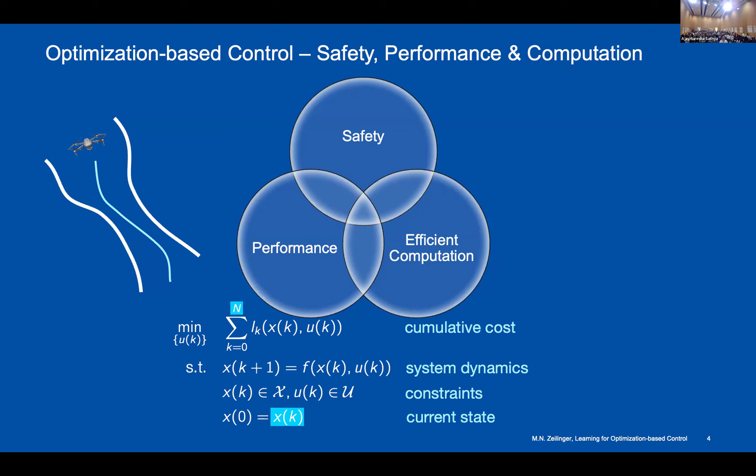As a result, we're usually not solving this problem, but we tend to solve rather short horizon problems, but we repeatedly solve them in sort of a model predictive control type iteration in order to mitigate this issue of solving these problems in real time. In addition, of course, there's actually lots of uncertainty in this problem when we think about doing this for rather complex control problems in the dynamics, because either we cannot model the full dynamics, we don't know it, it's changing, but also in the environment which we see through the constraints, or in the objective function, which has to usually be a rather simplified surrogate objective in order to solve these problems.

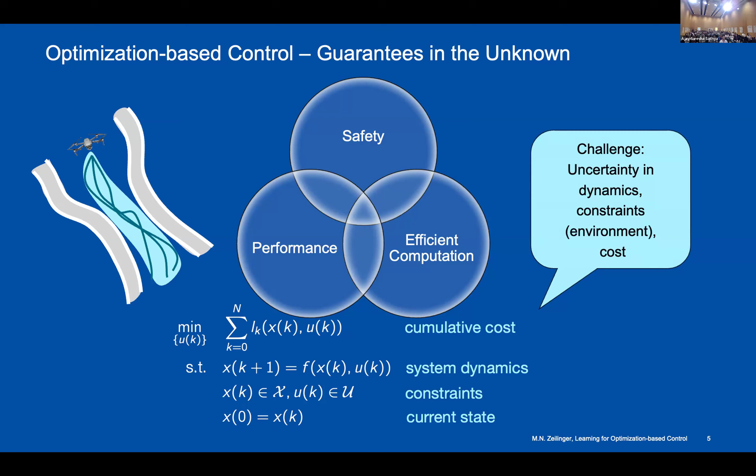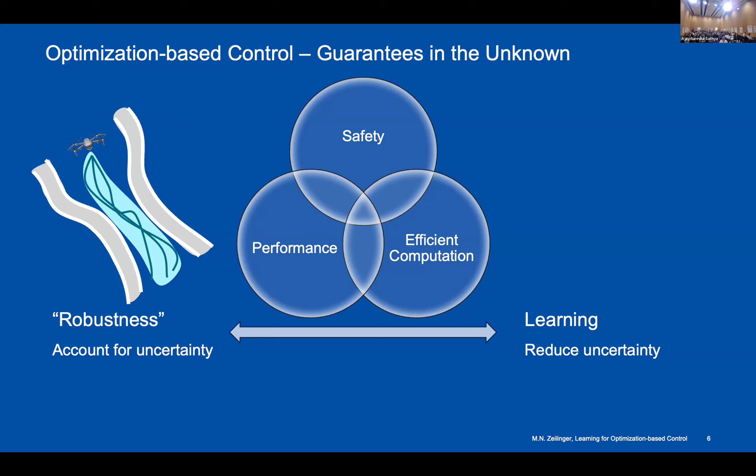So in our work, we take two sides to this picture. On the one hand, we think about how now to get these constraint satisfaction guarantees under uncertainty, which here I term loosely robustness under uncertainty. And on the other hand, how we can reduce the uncertainty by learning more about the unknowns. And it's really about the balance between these two and the interplay that I think we need to manage very well in order to get effective methods that are high performance and with guarantees. So I'd like to tell you a little bit about ideas that we have developed in the group on both sides of these.

But before we dive in there, let me just come back to this original definition of safety here for a moment. So I said that by just using a prediction of the dynamics, we can impose directly the constraints. But of course, if we only predict a short horizon forward, then this is not fully true because we want guarantees for all times. We actually need to think about invariance. So we'd like to have ideally an invariant or a control invariant set in which we know we can keep the system so we cannot violate constraints in the future.

If we write this in this predictive form, then it's actually not so bad if this is a conservative approximation of some invariant or control invariant set, because we can plan with the trajectory towards it and thereby get constraint satisfaction guarantees. This is, of course, no news for people working in predictive control because that's the entire backbone of it. But interestingly, you can extract that as a principle also to get constraint satisfaction guarantees in other combinations.

So people have now used this, for example, in multi-trajectory MPC, where you plan the performance and the safety trajectory. We've used it to run safe exploration methods. Or you could also decouple it from your optimization of a real control problem and think about this more as an additional component. So rather than integrating it into the controller, you can think of this as a component that just verifies if some proposed action can be safe, which is often termed a safety filter.

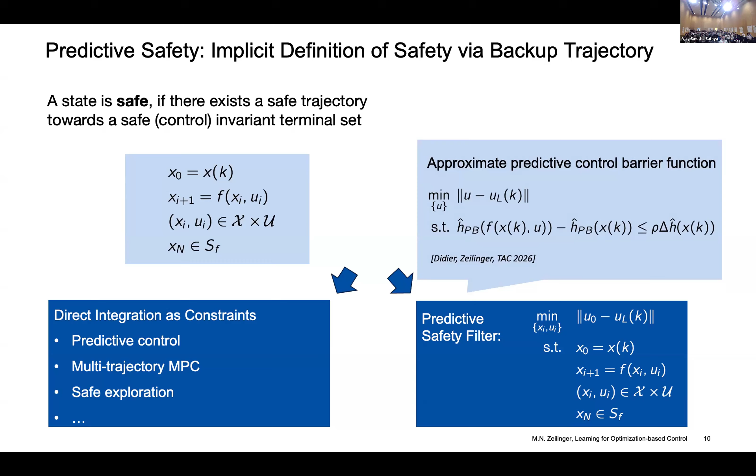They're all related. And if you're interested to read more, you can look at this article in the Control Systems magazine where we've tried to put the things sort of next to each other. But also control barrier functions, of course, in a sense, can be seen as an optimization-based way of certifying constraints, because rather than now having this prediction horizon, you sort of condense it into one decrease condition that you need to verify. And you can connect these two, for example, through approximations of this horizon into a single decrease condition.

So unfortunately, I don't have time to talk about this more, but this is sort of how we think about constraints. We think about it as planning a trajectory forwards to some safe set, and I won't be talking about the safety filter perspective for today. But now what do we do if we have uncertainty? Now we need to think about constraint satisfaction under uncertainty.

And as was mentioned before, our group has actually now spent, I think, a decade thinking about how we do this rigorously, both thinking about robust methods where you assume bounded disturbances, but also thinking about the stochastic setting where you could have potentially unbounded noise. For both of these directions, what is really key is to find a good balance between rigorous methods and guarantees, as well as computationally effective techniques.

And I'd like to briefly show you one variant, which is an online optimization method that we have developed. So let's assume that we have our nonlinear dynamical system and we have some additive bounded uncertainty on it. Now, the fundamental principle of robust constraint satisfaction is that you reduce your planning to a nominal trajectory. You apply a tracking controller to keep your uncertain system close to that.

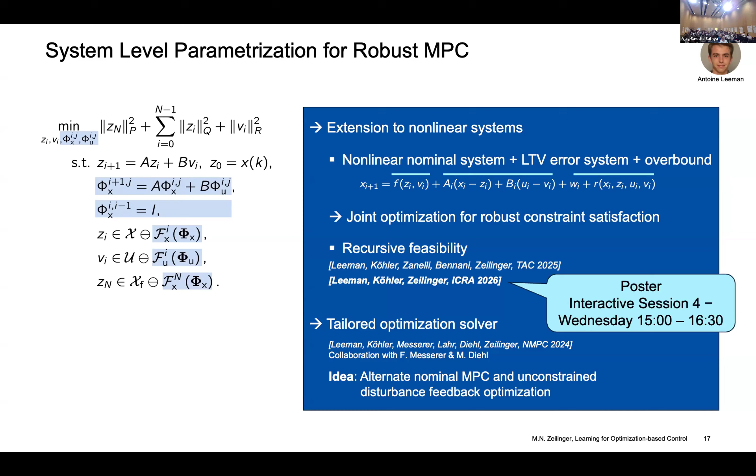So Antoine, who's working on this, has then also complemented this with the recursive feasibility proof. So you can now also run this in a receding horizon. And if you're interested, you can visit him at his poster on Wednesday afternoon, and he can tell you more about this idea. What's really exciting to see is that we get very efficient computation times.

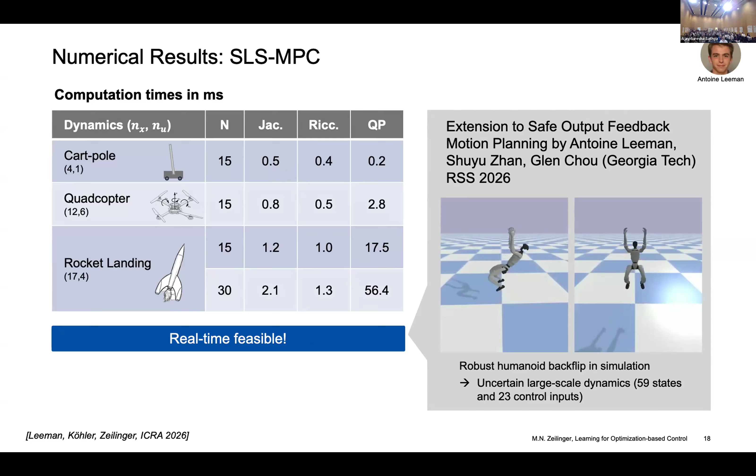We've done it for these sort of smaller scale systems, but recently he's also worked with Glen Chou from Georgia Tech to extend this and apply it to higher dimensional robotics problems. And also for this, we've extended it to output feedback. And what you can see here is a larger scale humanoid in simulation for which we were able to compute these robust nonlinear solutions in very efficient computation time. So I think what this is showing us is that we're sort of close to scaling these things up to full-scale robotics problems.

Okay, so now we have an idea of constraint satisfaction, and I've shown you one idea of what we could do when we need this under uncertainty and how we could do effective robustness for nonlinear systems. Now let's think a little bit about the learning side. So as we're thinking about learning in this optimization-based control setup, we'll think about this again in all the levels that we have in our optimization problem.

So we'll think about learning that can be used to improve a model of the dynamical system. Think about learning of the constraints in case we do not know them a priori. And we can also think about learning of the objective in order to get a better representation of the short horizon cost to improve the performance. I won't have time to talk about all three today, so I picked two. I'll talk about the dynamics learning and then the objective one, which is some recent ideas that I've been developing. And I'll comment on the constraints as we go through the dynamics.

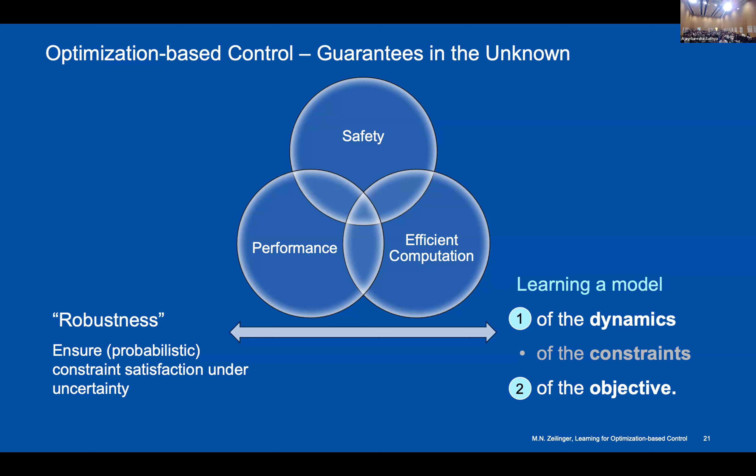So our group now has spent quite some time thinking about how we can make use of a Gaussian process model in order to improve the description of our dynamics if we have complex effects that we have a hard time modeling with physics-based models. Why a Gaussian process? Because it doesn't need a lot of assumptions on what we're modeling. Basically define the mean function, which is often even zero, and a kernel covariance function, and then you can condition on the data points, and you get a distribution of this function that you had a hard time representing.

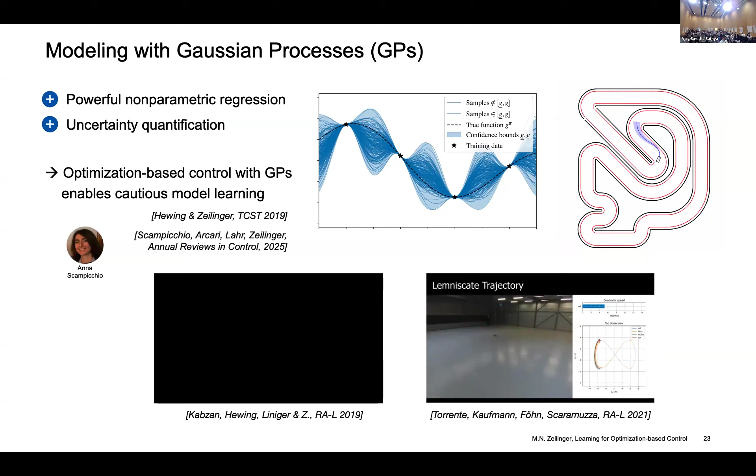And we've seen some very nice results in our group, but also other people have applied this, for example, to drone racing. But of course, in the spirit of getting constraint satisfaction, the nice thing is that we can also directly get an uncertainty quantification of the residual uncertainty that we have after using such a Gaussian process model. If you're interested in reading more, our former postdoc Anna, she's now an assistant professor at Chalmers, put together a nice review article on Gaussian process-based cautious model learning, if you want to read a little bit more about the details.

So in addition to getting this posterior uncertainty, something that has also become quite popular in the field is that by making certain regularity assumptions, you can come up with high probability confidence bounds, so upper and lower bounds on these functions that contain the true function with a certain probability, that you can then use in a sort of robust type framework. I'll here talk about the dynamics learning, but I promised I'd point this out. So you can do similar things when you think about constraint learning. If you don't know the constraint, then you can represent it as a GP, for example, and then do safe exploration by sort of slowly learning more about your constraints.

I think we've made significant progress in two directions recently with this GP-MPC. One is in the computational direction, and the other is in the theoretical one. The first one, and this is Amon's work, who's here in the audience, is to really think about an efficient implementation. And this is also a collaboration with Moritz Diehl and his team, where first we were able to connect this to an approach that they call zero-order approximation, developed for robust MPC. And we can extend this to GP-MPC to show that we do get feasible solutions, but suboptimal, of course, at

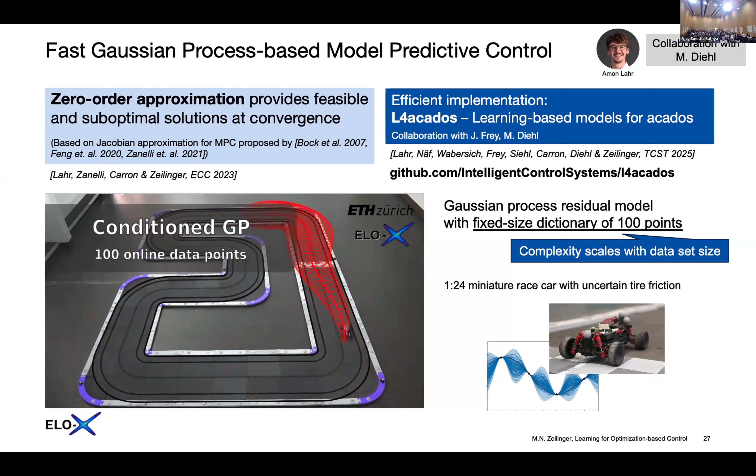Here's an example for a small-scale racing setup in the lab, where we have the car with uncertain tire friction that's modeled with the GP. And we run this with 100 online data points, so a fixed dictionary of 100 points. Because, of course, the disadvantage of the GPs is that the complexity scales with the number of data points. So here we fixed it. But what you can see is that you can run this very effectively in real time while propagating these uncertainties. Of course, what we didn't like is that fixing of the window, and so many other sparse GP methods had similar disadvantages.

And so Amon worked with a student, Lars, and they extended this now to a spatiotemporal GP setting, where the nice thing is that we can rewrite the temporal aspect as a Gaussian state space model, and then apply things like recursive Kalman filtering to get very effective constant time updates. So now you do not have to window your data anymore, but you can really just run this through your streaming data. And I think this is a very nice start to thinking about this continual learning and adaptation.

The example that you see here is one where we have a time-varying perturbation on the steering. So what is applied to the system is not directly what we plan and compute. And you see in a moment when the perturbation happens with the nominal MPC, then it deteriorates in performance. If I fast forward a little bit, if we now have the spatiotemporal GP-MPC, you can again see these uncertainty propagations. We do not have a perturbation yet, but when the perturbation happens, then we immediately learn about this because we're just continuously taking in the data, and we are able to maintain the very low lap times and the nice performance of the system.

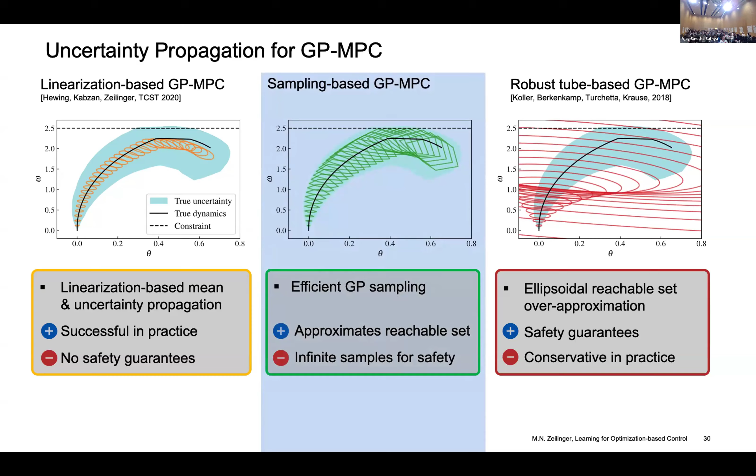I want to show you one idea that I think is appealing because it's based on sampling. So it's rather practical and what people probably would do. So you're thinking about sampling from your GP, and what we see is that you can actually get very good approximations of your reachable set. But of course, thinking about this confidence bound, you could first think that you would need an infinite number of samples to cover that and to get safety guarantees. However, you can pose the question slightly differently and actually ask, well, I need a sample that is close to the unknown function.

So how many samples do I need? And that's sort of what Manish worked on. It's work with Andreas Krause at ETH Zurich, where he was able to come up with a sample complexity bound so that we can guarantee with probability 1 minus delta that we have a sample that's epsilon close to the unknown function. And then now you have this epsilon uncertainty that you need to propagate, which is much better than the full uncertainty spectrum that you had with the confidence bounds.

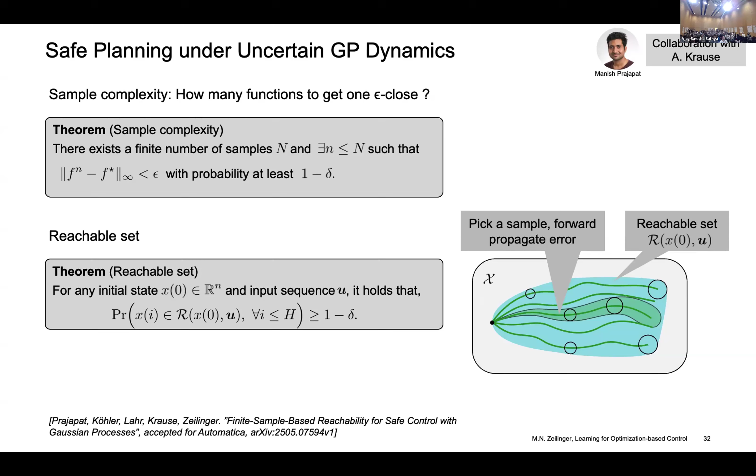So now you propagate these uncertainties around your sample trajectories to give you the reachable set in which your unknown function can lie. You can directly put this then into your predictive control formulation by now solving it over your samples and tightening the constraints appropriately. We've worked both on the theory of this, and here you can actually see this again running on the race car where we have, I think, about 30 samples running forward.

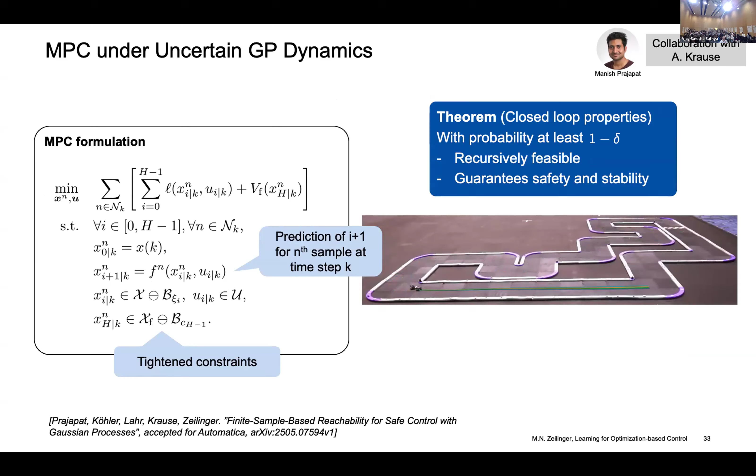So we worked on the theory, so we can also give closed loop guarantees for this, because the feasibility is a tricky one, but you can also get that. And Amon has then also worked on a tailored solver for this, which we presented a couple of years ago for sampling-based GP-MPC to also make that run very efficient.

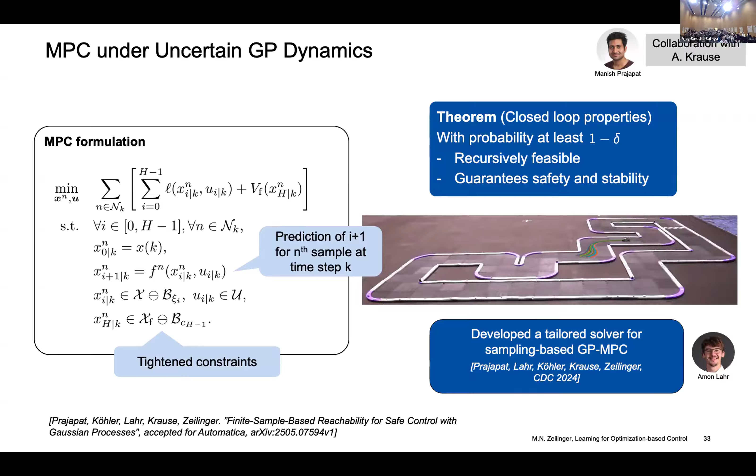All right, before I run out of time, I do want to talk a little bit about this idea of learning about the objective. So what is the idea? As we said at the beginning, we often have to run with very short horizon costs when we run MPC. And that is often hard to design, but it's also difficult to capture a lot of context and additional information that you can get in this objective function that you want to minimize.

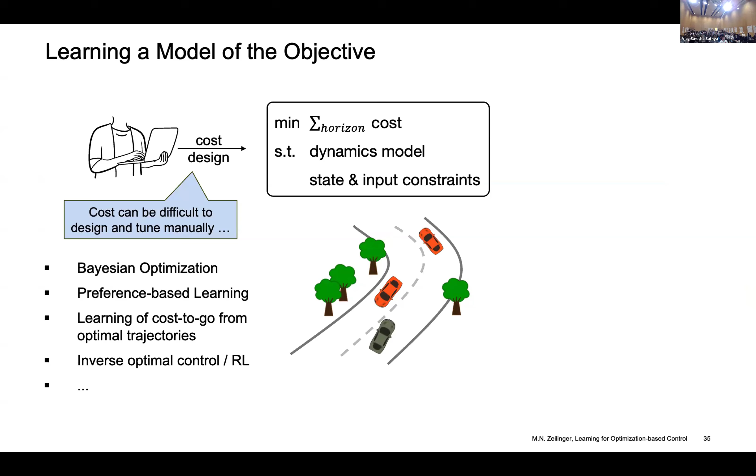People have approached this with different methods, auto-tuning, preference-based learning. What I'd like to discuss with a few examples is how we could learn the objective from demonstrations. And again, our key focus here is that we're thinking about constraints. So constraint settings, and we want to learn the objective from demonstrations. We could do this with inverse ideas. So you see an optimal demonstration and you have to come up with the objective function. But I don't want to go into more detail.

I want to show you some ideas for very recent things where we're trying to connect some of the powerful learning methods that we have today in order to map rich context and information into a short horizon objective function that we can then solve with the MPC. And by keeping this optimization problem, we get very nice generalization and we keep the constraints in there, which is really the benefit of doing it this way.

The first idea is called ZipMPC. So what is it? Well, we assume that if you had a very long horizon to look ahead, then you could take all the information, all the context that you want, and you would be getting the true optimal solution. Now, what you do is you try to imitate that with a short horizon MPC cost. So you're basically learning the cost parameters. It was mentioned before that what people have tried is to learn the terminal cost, right? So here, this is actually a generalization where you're learning all the cost parameters to get a better approximation of this very long horizon behavior.

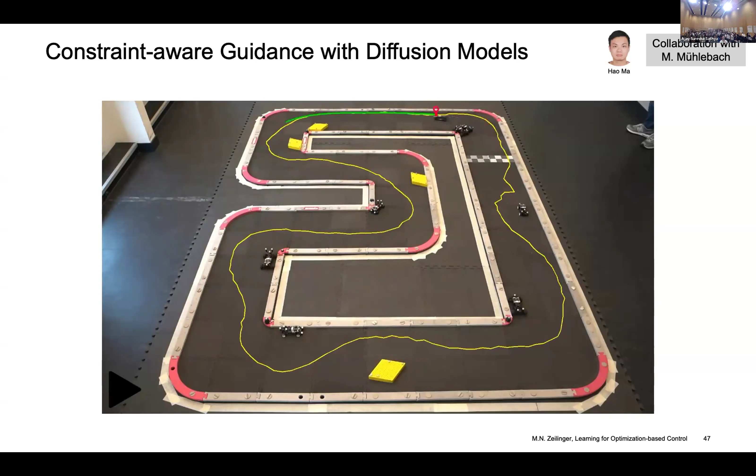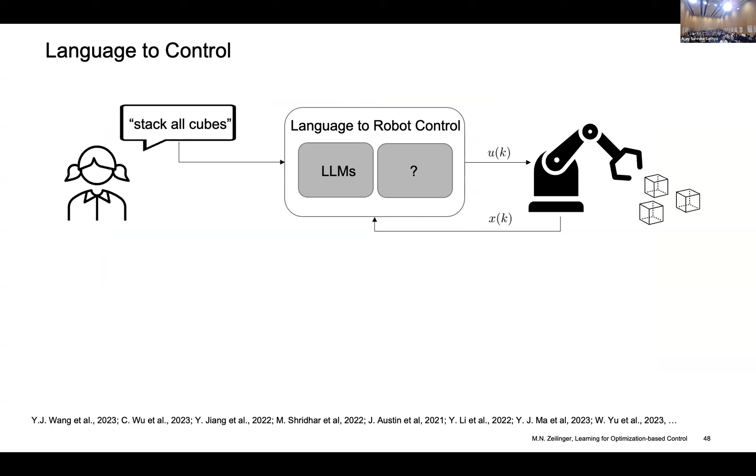Okay, finally, I'd like to talk about another idea that's pretty obvious and many people have thought about: using language directly to design the optimal control problem. It's very tempting that you could just say to your robot, stack all cubes, and then it would go ahead and execute that command. Well, why would you want to do that with LLMs? Because they're very good at breaking down your complex tasks into subtasks.

And actually, I was surprised to see this at the time. It's also very good at coming up with optimal control problems for each of these tasks. So it's actually kind of appealing. However, what's a little bit hidden is that you have to train this very carefully with examples for each of these subtasks for this to work. Plus, when you give it a new task, you have no idea if it actually works or if it will do something incorrectly.

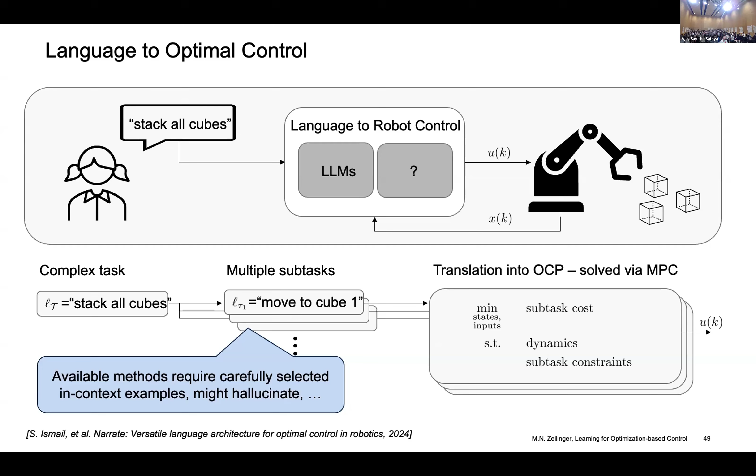So we've thought about this problem, and we address these challenges in two different ways. One is that, in order to learn these subtasks, we write it as an inverse learning problem, also under constraints, so that we can effectively learn the subtasks from demonstrations. The second one is that we assume that there is some structure underlying the robotics task. So when you're grasping something, it doesn't change completely from task to task.

So we're assuming that there's a mathematical structure, some features that are shared, and parameters that, of course, vary between the tasks. And then we learn a mapping from your language embeddings to these parameters in order to generate the optimization problems to execute the task. What this allows us to do is to assess subtask similarity if we're seeing a new task, to say, are we confident that we can execute this task or not? And then we can reject the task if we're not confident.

So this has been a great collaboration between three different labs. We also worked with the Robotic Systems Lab at ETH to bring this first in simulation onto a robot arm, build a pyramid or clean a plate, and then we also brought it, just for demonstration purposes, onto the real gripper. But I think it really shows another nice way of using some of these powerful tools and connecting them to optimization-based control problems.

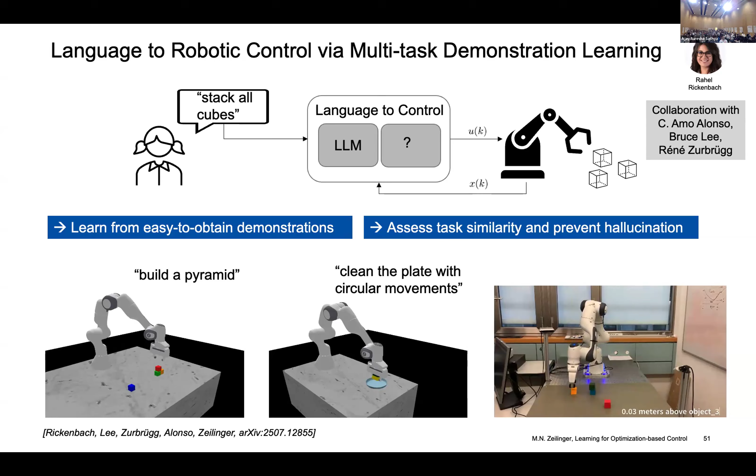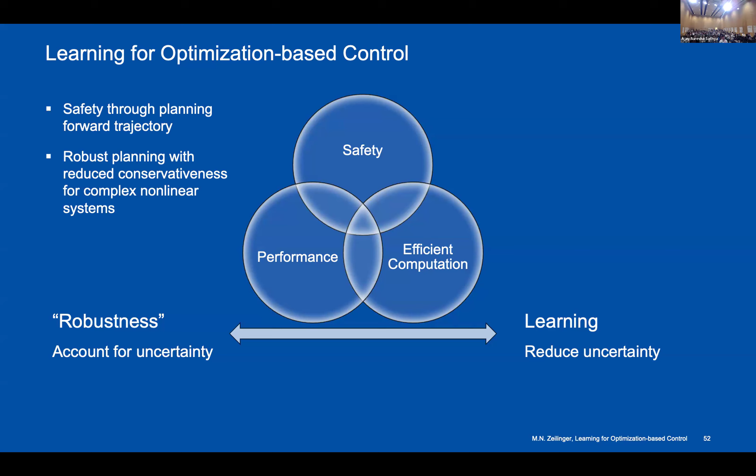All right, so this brings me to the end. What I wanted to convey is that optimization-based control is a great foundation to combine strong safety guarantees and high performance. We talked about robustness, thinking about safety through planning, and robustifying this with online optimized error mechanisms. And then we talked about learning, Gaussian processes for dynamics learning and MPC.

And also, lastly, this idea that we can use a short horizon effective optimization problem and use learning to improve our short horizon objective function, to bring in all the context, all the information that we can learn with other tools.